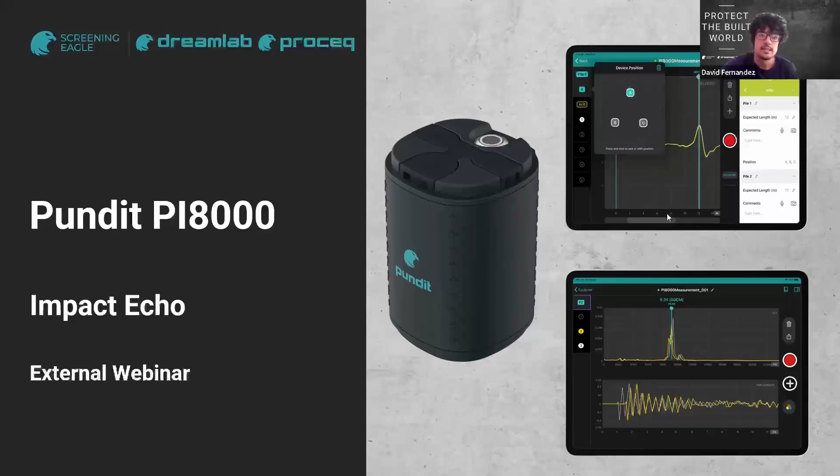Okay, so I'm going to start with a quick introduction on the market, their needs, and why we think this product is going to be really useful for our future clients. So we have the concrete market in the civil infrastructure, and this is a huge market. Every year, around 20 billion tons of new concrete are built. So you can imagine how big this market is worldwide, and it's a very important one.

And in this market, I like to separate the civil structure into 2 different parts, because you will see our device has 2 different features. So that's why I think it's important to differentiate. So we have the above grade structure. There we have buildings, airports, highways, harbors, any kind of civil infrastructure you may have above the grade level. And then we have the below grade structure. As an example, we have tunnels, foundations, retaining walls, metro, subway. You can imagine there are a lot of different types.

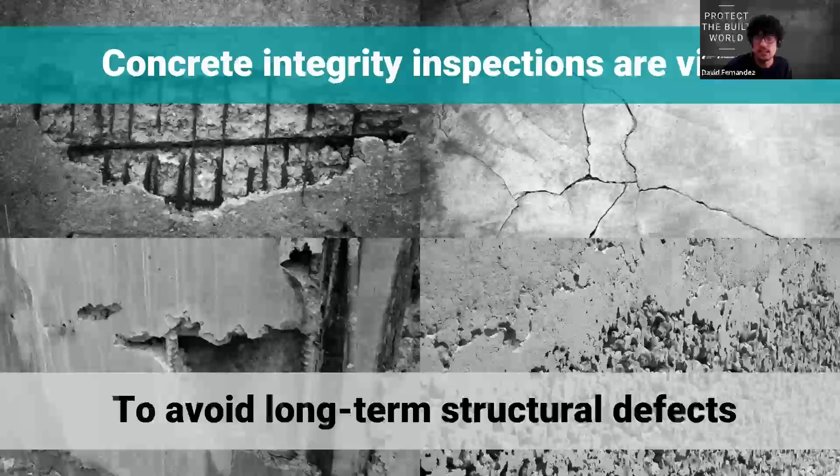And another topic which is really important is that concrete integrity inspections are vital. Concrete has a lot of long-term defects that are normally visible after some years of the initial construction. The most common ones are delaminations, also internal and external cracks. Then you can also have corrosion, that normally also causes delaminations, honeycombs, etc. So that's why it's so important to prevent these damages that are going to affect the structural integrity by inspecting this infrastructure regularly, right?

One of the main problems that some users may have is the estimation of the thickness whenever they want to refurbish an existing building, for instance. They want to know the thickness of a particular slab. So there are some destructive methods, such as the one in the image. You can drill a hole inside this concrete element, and then use a measuring tape to measure the total thickness of the element. But of course, this method is intrusive. You're going to need to repair the concrete afterwards. It's also time consuming, and it's costly, because you can affect one of the inner rebars.

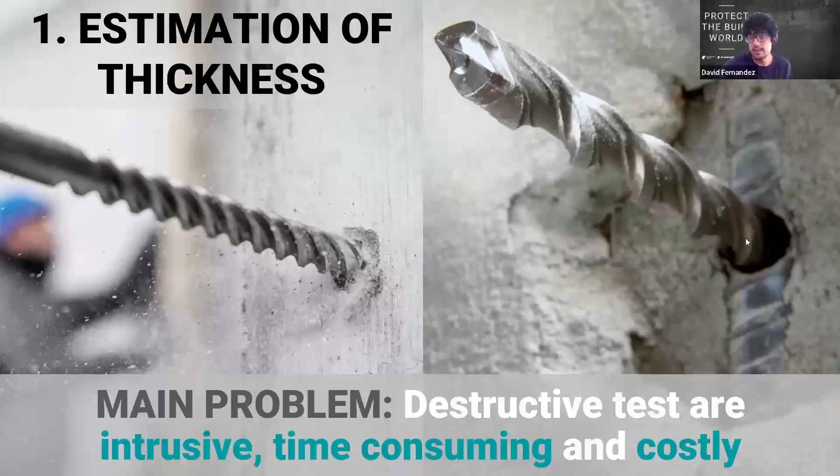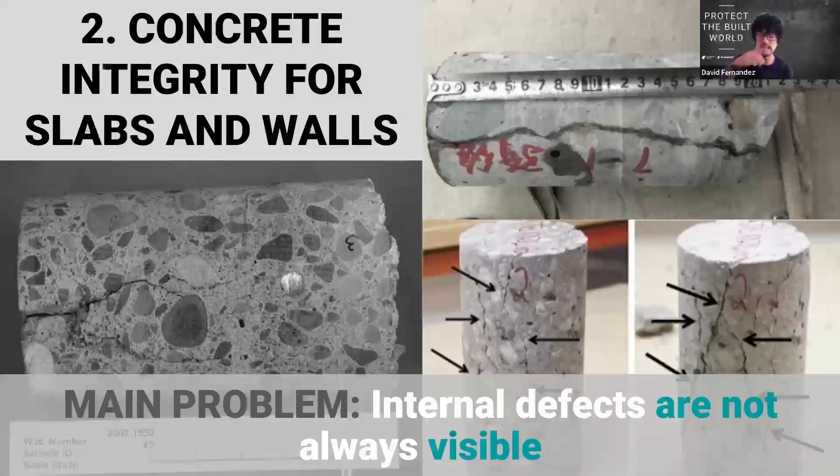And for the estimation of the integrity, a good option is to extract concrete cores. By visual inspection, you can see if there are some internal defects, as you can see in the image. But again, this is a destructive technique. It's really accurate because you can see the defects visually, but the problem is that we need to repair the concrete voids afterwards. So that's where Impact Echo testing is a really good alternative, because it's a non-destructive technique and it's also fast and inexpensive. So this is a very good technique if you want to avoid these destructive techniques that I was talking about before.

And on the other side, as I talked about before regarding below grade infrastructure, we have the foundation piles, which are normally used as a foundation for big buildings whenever we have a soil that is not really strong. So then instead of a shallow foundation, we have this deep foundation, which is the opposite of the shallow foundation. And the main problem here is that there are three techniques that are quite well known, but are expensive and normally require advanced preparation. We have the static load test, which is normally required to test some of the piles that you are constructing, but it's very intrusive and you need huge auxiliary members.

And then this is similar to the dynamic load test. Lastly, we have cross-hole sonic logging, which is a non-destructive technique, but it requires placing embedded tubes inside the pile prior to casting. So you can insert cables with sensors on them.

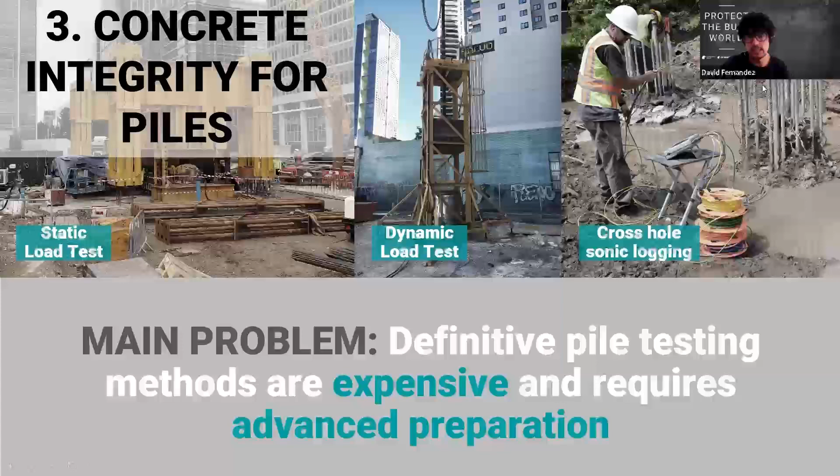So here again, we offer a different technology with the same sensor, which is the low strain pile integrity test. It's also non-destructive, fast, inexpensive, and you don't need to do any kind of preparation in advance. So whenever you have finalized the pile, after some days, you can test it with our system.

One topic I'd like to talk about is this one sensor. With just one sensor, we have two different applications. Both are for estimation of concrete integrity, but on one side we can test piles or foundation piles, estimating the total length of the pile and detecting internal defects. On the other side, we can test walls and slabs, finding the thickness and detecting internal defects.

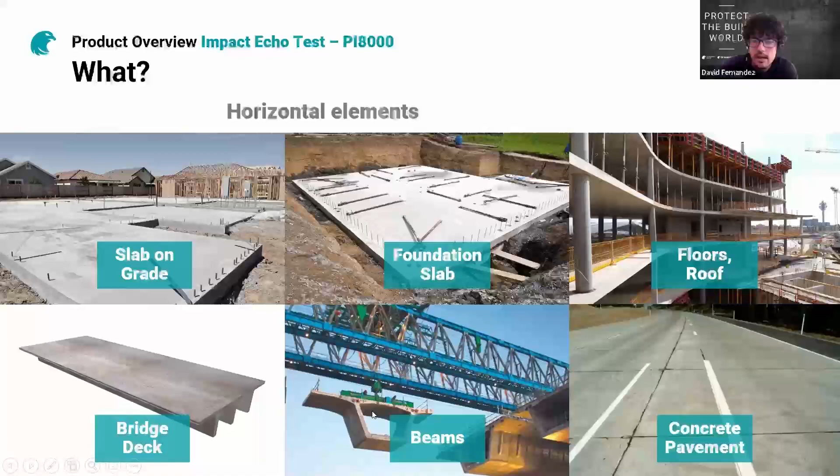So for horizontal elements, I have some examples here, but you may find others in your daily work. We have slab on grade, foundation slabs, any kind of flooring inside the building, bridge deck, any kind of beams — this one is for a concrete bridge, but you can also test beams on a building — and concrete pavement.

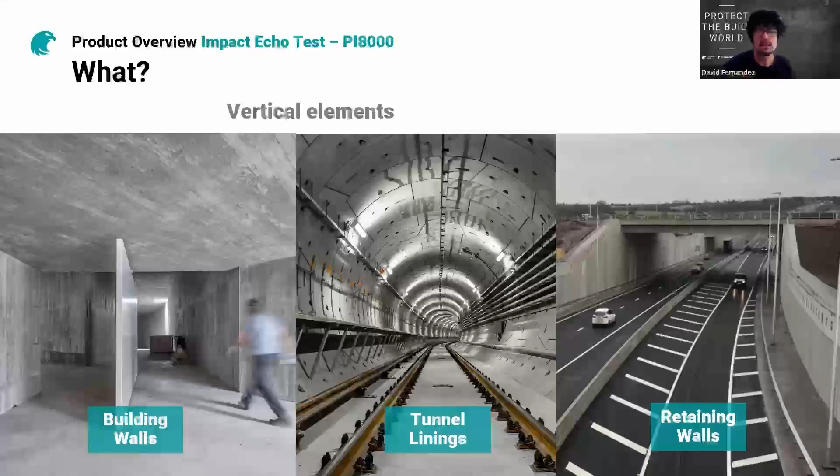For the vertical elements, we have internal building walls. We can also have retaining walls in a highway, or also tunnel linings. So any kind of these concrete elements which have a shape of a structural plate can be tested with this impact echo methodology. So the preparation is really important.

There are some limitations of this system. The first one is that you need to test over a concrete plate. What I mean is that the minimum length has to be at least 6 times the thickness of the element. That means you need to test slabs or walls like I was showing in the previous slides. This is because if you test very near the boundaries or edges of the element, you may have boundary effects, getting reflections from the sides, and sometimes it's complicated to understand the signal completely.

So this is a recommendation, but of course there are some advanced impact echo users that also test over concrete columns and concrete beams. But you need to be a little bit more advanced with this technology.

As I said before, we perform a dry contact solution, so you don't need to use any coupling agent. But in any case, the surface of the concrete has to be smooth and clean. We provide some plastic stickers that you can place over the sensor tip, just in case you're not getting a good signal because the concrete is not completely smooth. You can always place those stickers, they remain on the tip for a very long time, and you just place them there once and use it as many times as you want. So this is very quick and very convenient.

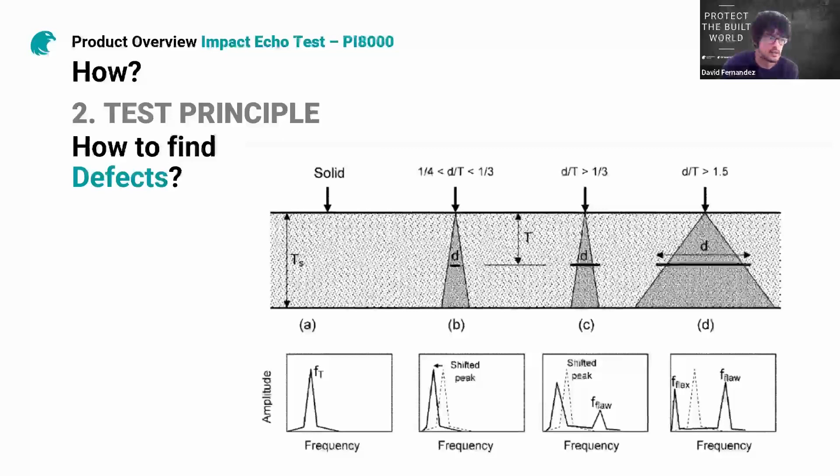One very important topic is the calibration of the wave velocity. This technology is standardized, I mean Impact Echo is standardized in the ASTM C1383 is also standardized in a German guideline. There are three different methodologies covered by this standard for the calibration of the velocity.

One of them is the automatic calibration. For that, you need two transducers that you put one separate from the other, around 300 millimeters. This is something we don't provide with this first version of the sensor, because it requires two transducers and it's much more expensive, almost double price. So we decided to provide the manual mode.

The manual mode is also really good, because you only need one transducer or one probe, and then you just need to go to one element that you know the thickness of. So imagine you know the thickness of one particular concrete slab. Then the only thing you need to do is input here the expected thickness of this element, let's say 200 millimeters.

There are two different options to calibrate: one is manual and the other is automatic. I will show you later in a video, but you can scroll this velocity slider until you match the peak. You see there is a thickness number, so you have to make it match with the expected thickness. This is the more manual way to do it. But if you don't want to do that and just want to know the exact velocity speed number, you just press the calibration button and the app will do it automatically for you. We will see it later in the video in more detail.

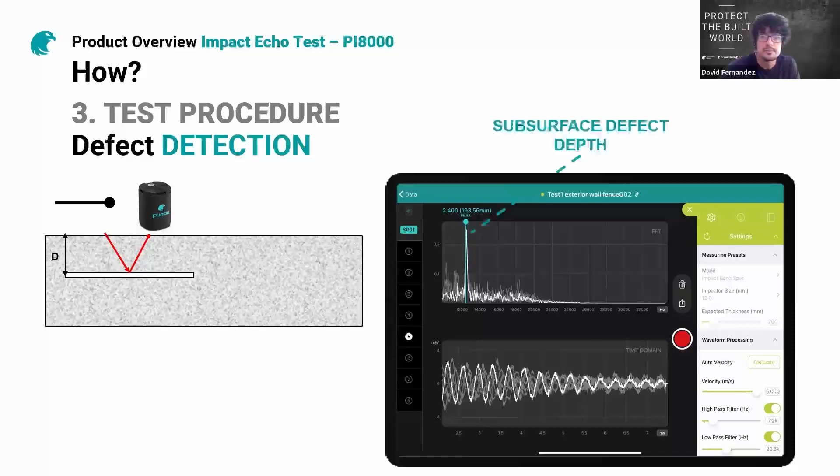So we have two different measurement modes. One of them is called the spot mode, and the other one is the grid mode. The spot mode is really, really useful for quick concrete integrity checks of small areas. So you can define various spots. Then you can also make multiple impacts per spot.

You can delete any spot if you need it. Then you can also delete any impact if you need it. In some cases, you may perform a wrong impact, so you can always delete it, so you don't have any fake data. And then, as I said, the best impact per series is automatically detected by the app, and all the calculations are done by using this particular impact.

Then we provide two different buttons to arm and disarm the probe. You can either use the iPad button, or if you want to just use only the sensor and not pay attention to the iPad, you can always use the button on the sensor itself, which is really, really handy and convenient. So let me show you a video about the spot mode.

So then you have here the three different methods: the pile integrity, which was launched last summer, and the two new measurement modes. Then I'm gonna select the impact echo spot mode. And first, as we have three impactors, you can select the impactor that you are gonna use. And then you can input the expected thickness. So let's say we have a 500 millimeter element.

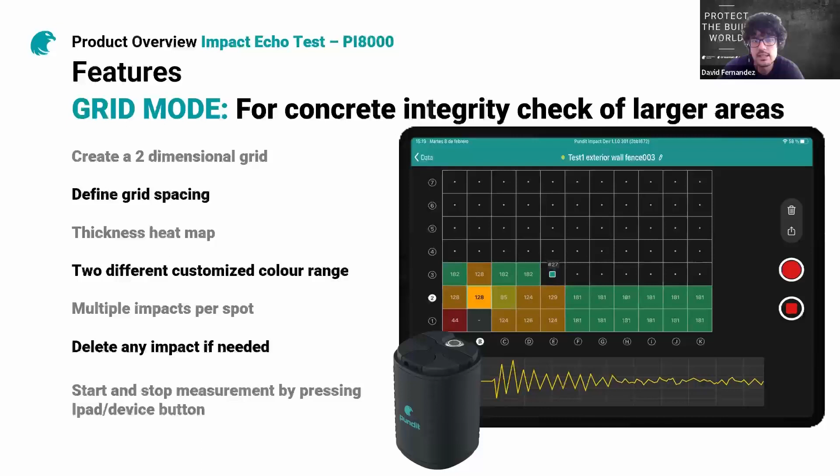So in this particular example, you see that our concrete element has a thickness around 180 millimeters. So it's very likely that this area has some kind of defect, as we are not getting the same signal. And then we provide two different customized color ranges. And it's the same as with the spot mode. You can perform multiple impacts per spot, and then you can delete any impact or any spot if you need it. So again, I'm gonna present this video.

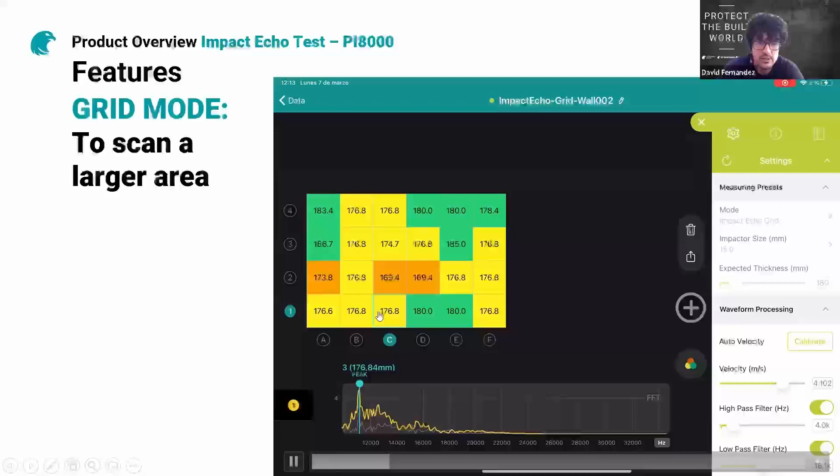So this is a grid scan that I did the other day. This is already completed. So I can just go from A1 to C1. So I can move from one cell to the next one. Then I can see the different impacts that I have done per cell. If I use two fingers swiping up on the iPad, then I will go to this visualization of the time domain and the frequency domain. And then again, here I also can play just to calibrate a little bit.

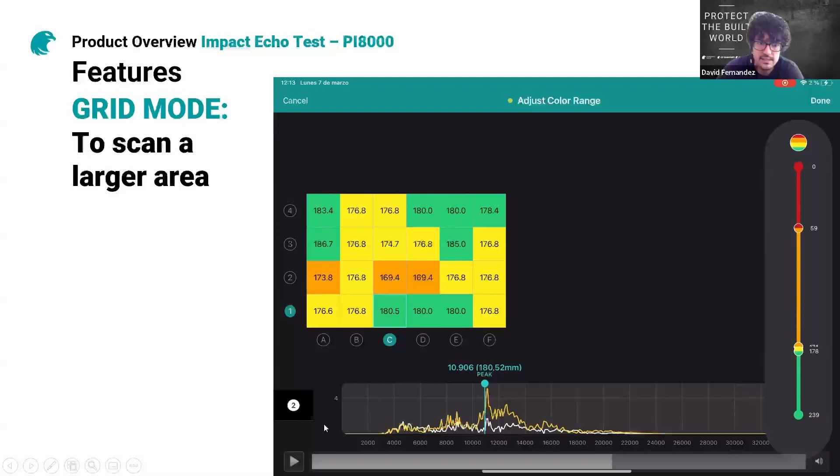So this example is a good one to see that in this area, it should be around 180 millimeters. So maybe in the area that is orange, we may have some minor problems because we are having a peak that is a little bit shifted, right? And we saw before, when you have a small shift on the frequency peak, it's very likely you have small defects inside. So then you can always play with the color ranges. Okay.

So then we have a lot of additional settings that are really good not only for expert users, but also for non-expert users. So we have this auto gain functionality. We automatically do this transformation from time domain to frequency domain. Of course, as I said, the frequency domain is easier to understand than the time domain graphic. Also, this peak on the frequency domain graphic is automatically detected. So then you will automatically have the thickness of the element.

And we have these very useful high and low pass filters that are very good to eliminate the noise in the very low frequency or high frequency areas. And you have full control of the filters that can be applied to all spots. So once you have set the filters, they will apply to the future spots you are testing. And finally, we have this comparison mode. So you can compare the different impacts per spot. So you can neglect one of the impacts.

Yes, this sample is really good because we have this blue small signal on the bottom that is pretty sure an incorrect or a mistaken impact. Maybe I just made an impact on the sensor or whatever. So I can delete this impact, which is number one, the one that is highlighted. I can long press on number one, and then I can delete the impact. So it's no longer there.

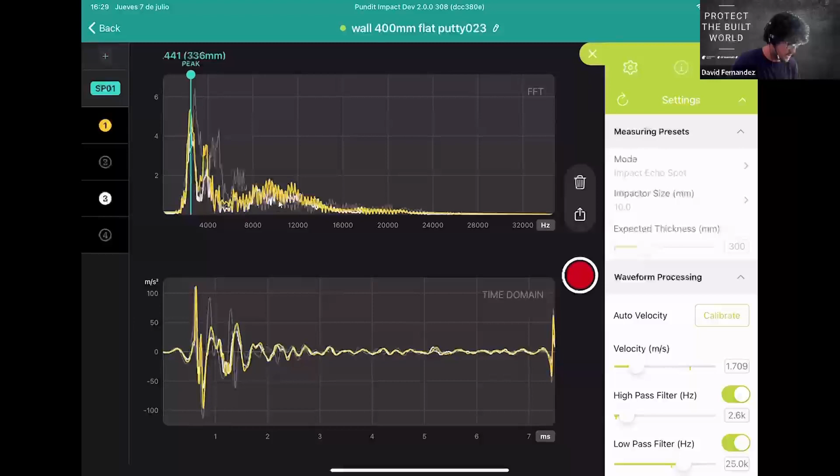It's completely real time. I'm gonna show you later a demo file that I did yesterday, because this signal makes no sense as I am testing over a table. But this is just to let you play with this, so you see how fast the acquisition of the data is. So then if I don't like one of the impacts, I can delete it. Then I can create a new spot, right? So I can just make again some impacts.

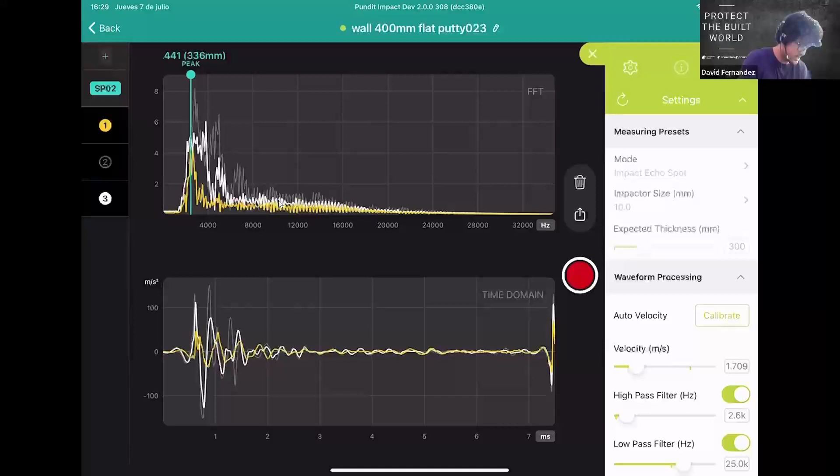Okay, so just imagine the thickness of this element, let's say, is 300 millimeters, right? And then you see here it says 336. So this is because the velocity is not calibrated. So I can move this scroll manually, or better, I just click calibrate, and then you see now it's 300 millimeters, matching the expected thickness, and it's telling me that this velocity is 1,526 meters per second. This doesn't make sense because, as I said, I was just testing on my table, but this is just for you to see how it works.

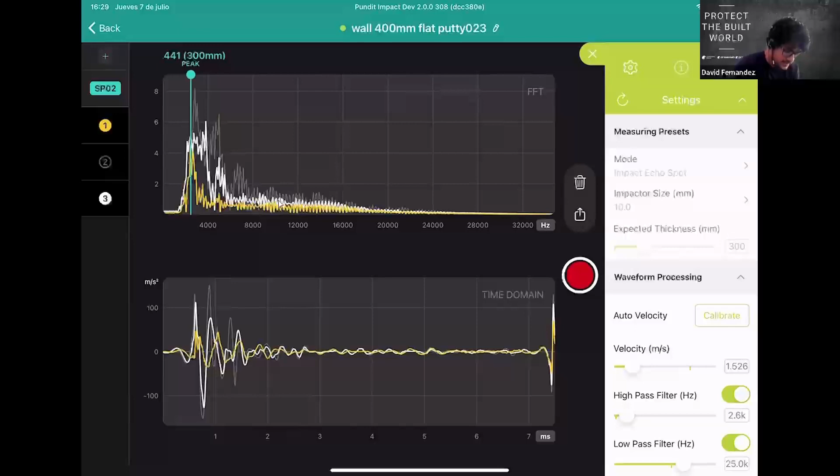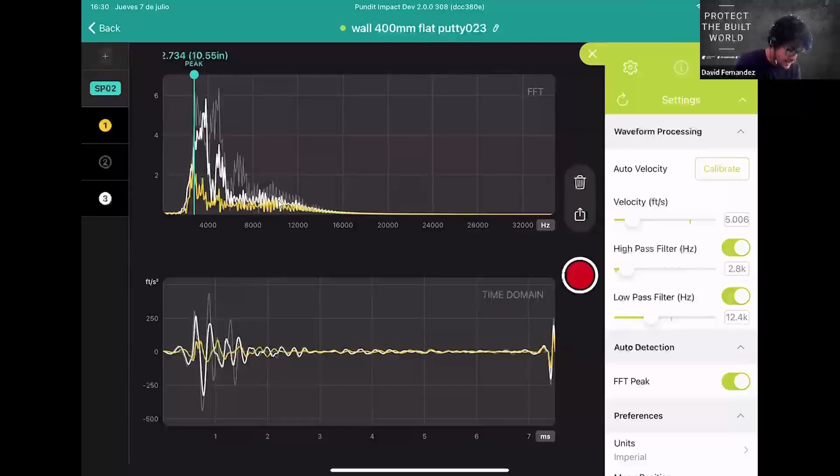Also, we have these high pass filters and the low pass filters, so you can play with the graphic a lot. And then we have also imperial units or metric units. I would say most of you joining this webinar are from America right now. So I can just put it on imperial units, so I have the units in inches. And then I can create any comments here.

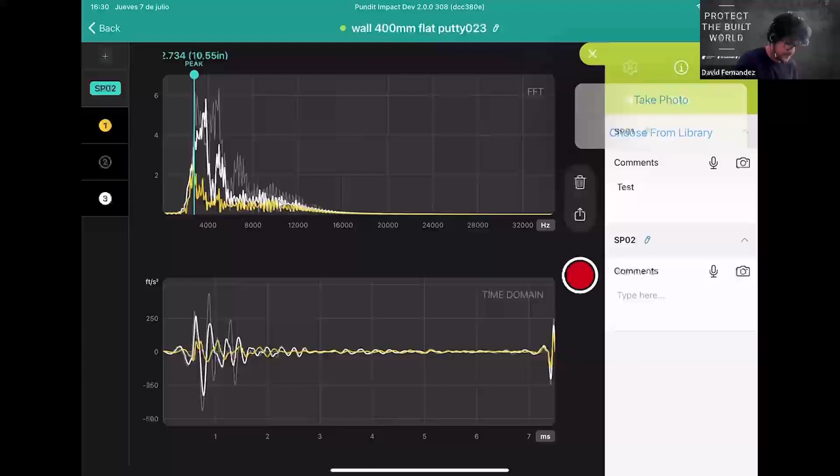I can also play with the audio comments or make a picture. So let's make a picture. Okay, so this photo is gonna be there. And then you have the logbook, which is really good. It's just for traceability about what you have done with this particular test. So you see, this is the location. Right now, I am in my house in Malaga, Spain. And then you can see everything that I have done before. So the traceability is really good. So just let me show you quickly one real example.

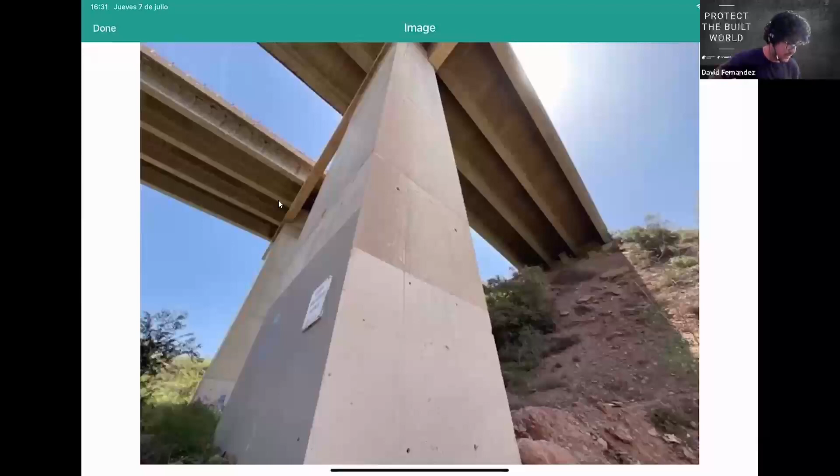So for instance, the bridge. So this is a bridge that is nearby my house. I would like to show you some pictures so you have an idea. Okay, so this is the bridge, and I was testing this concrete column, which is a hollow concrete column. So I was testing in the front face and in the side face of the column. So that's why I have two spots, right?

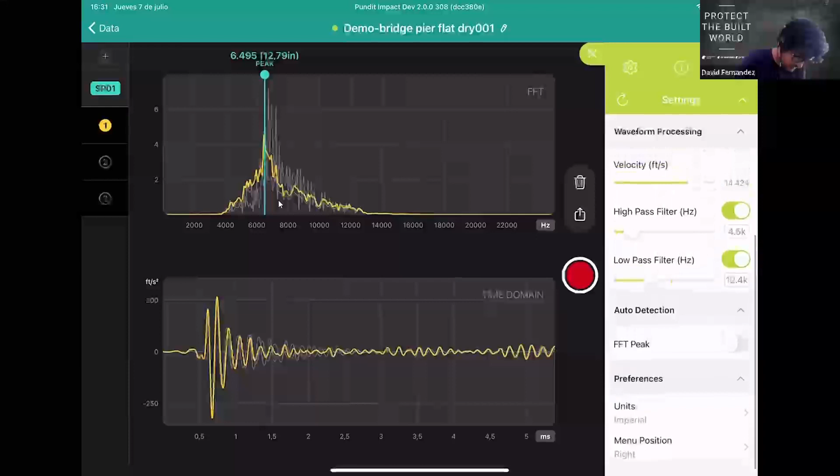So on the first spot, you can see here, this is a more normal graphic that you will normally see whenever you are doing impact echo. So this is around 13 inches thickness. So just let me go back to millimeters just in case. Okay, so this is 325 millimeters, which is a normal thickness of this kind of elements.

And then I can go to the spot 2. And this area is thinner, sorry. So you see this area is around 200 millimeters. And as you see, all the impacts are more or less similar. That means there is not internal defect in here.

And then I want to present also a demo file of a grid scan that I did. This one, for instance, okay. So that one, it was a wall. I don't think I have the picture, but it's a retaining wall in my office. And then it was 250 millimeters. I was able to measure the thickness because the top of the wall was visible.

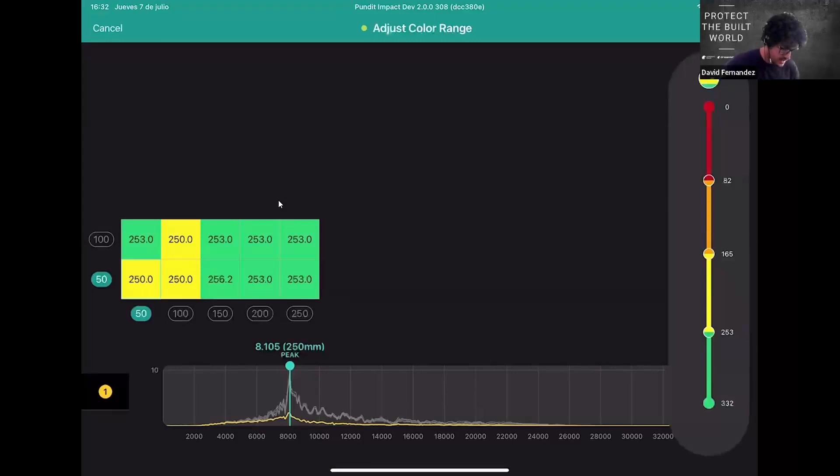So you see, this wall is perfect. Here, I can select 250 millimeters. And then you see everything is green, which means the thickness of this element is always the same, meaning that there is no internal defect. So again, here I can select the impacts that I was doing. And then if I just swipe my two fingers up, I can go to this time domain and frequency domain graphic. So I can press any of the cells, and then I can see individually each of these cells.

Okay, so let me go back to the presentation. All right. So I think this has been more or less useful for you, I hope. And this is a summary. So for what is this technology? We have already talked about this, but I would like to summarize everything. So this is just to estimate the concrete integrity for walls and slabs. You can measure the thickness and you can locate any kind of internal defects.

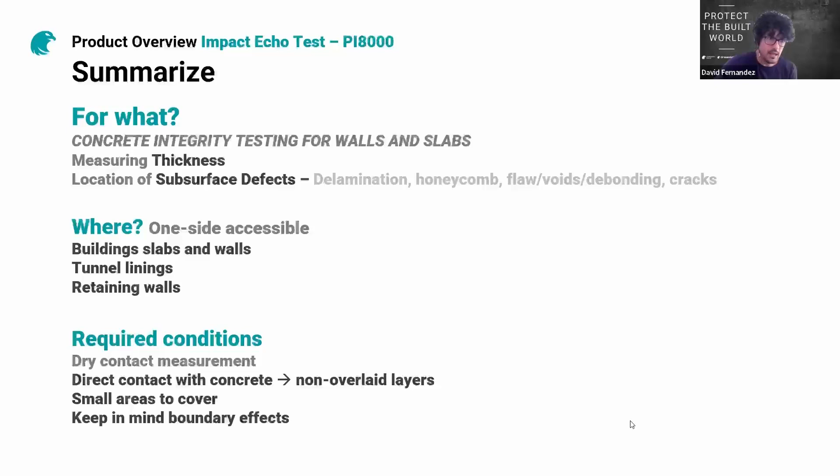So you can use it to detect delamination, honeycombs, flaws, voids, debondings, cracks. And also we have some clients using it to detect voids inside precast ducts. So this is also a technique that is applied. And the required conditions, as I said before, dry contact measurements, so no coupling agent is needed. It's normally used with a direct contact over the concrete. But I know some people that also use it over asphalt overlays, but it normally works better if you are testing concrete elements. And this is very useful for small areas to cover.

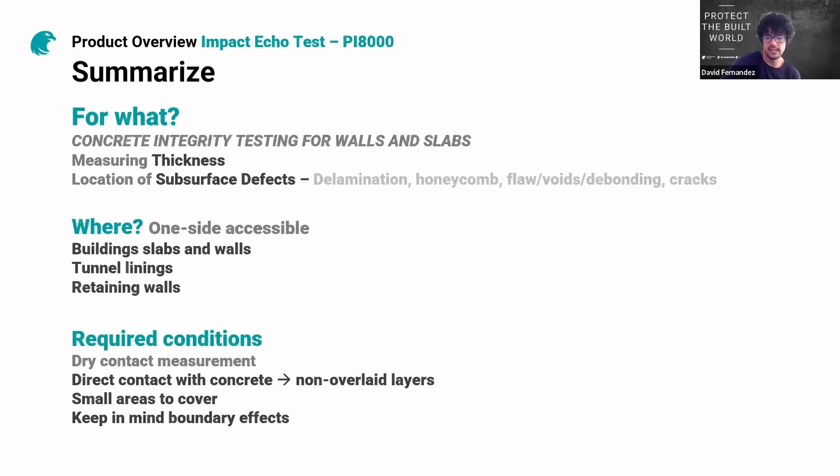If you want to do a huge scan of a bridge, we have some other concrete sensors in our portfolio. That's why I would like to present also in this slide the PD8050, which is a different sensor in our portfolio. Some of you may know it. And this is, of course, a more powerful tool whenever you want to do a bigger scan, because it's faster and also the visualization of the data is more powerful. But in any case, the PI8000 is really useful to just check a spot and small areas. It's a very light and quick device for concrete integrity inspections. And as you saw, it's really, really easy and really quick.

And it's really good when you have areas with a lot of rebars, because this methodology relies on the impedance, as I said before, and the impedance of the steel is similar to the impedance of the concrete. So if you have a lot of rebars, the sound wave will travel through those rebars, and then you will be able to detect voids below those rebars. So this is a very useful tool for that. And this is standardized in the ASTM. So if this is standardized, it's easier to use it for a particular client, because it's standardized in the ASTM standards. And as I said, it can be used for pile integrity testing. So this is a 2-in-1 device, which is also very, very useful.

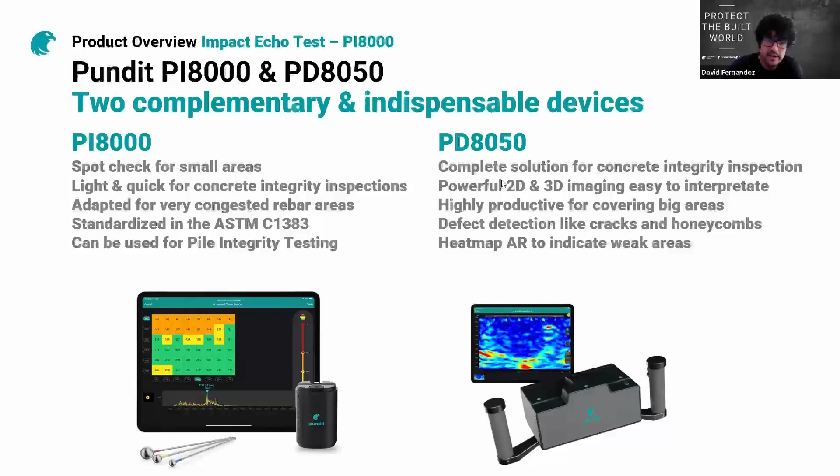Okay. And the PD8050 on the other side, as I said, is a very useful and powerful machine for bigger scan areas. The visualization is easier because it has powerful 2D and 3D imaging, which is easier to interpret if you are not an advanced user. And we also offer in this device an augmented reality heat map to indicate these weak areas. So as I said, this device, PI8000, is standardized. When we are talking about pile integrity testing, we have this standard, the D5882. And for the impact echo technique, we have this German guideline and also the ASTM C1383.

So as you can see in the image how small it is, if you can see me, right? So it's very small, and the impactors are like that, okay? Okay, so we have 3 impactors, as I said.

The smaller one is useful when you want to check thinner elements and superficial defects, because it creates a high frequency wave which has less penetration but much more accuracy. Not accuracy, but I would say much more, I don't know how to say this, let's say accuracy. And the bigger impactor provides a lower frequency, which has more penetration, but is less accurate than the smaller one. So the biggest one is really useful if you want to test thicker elements.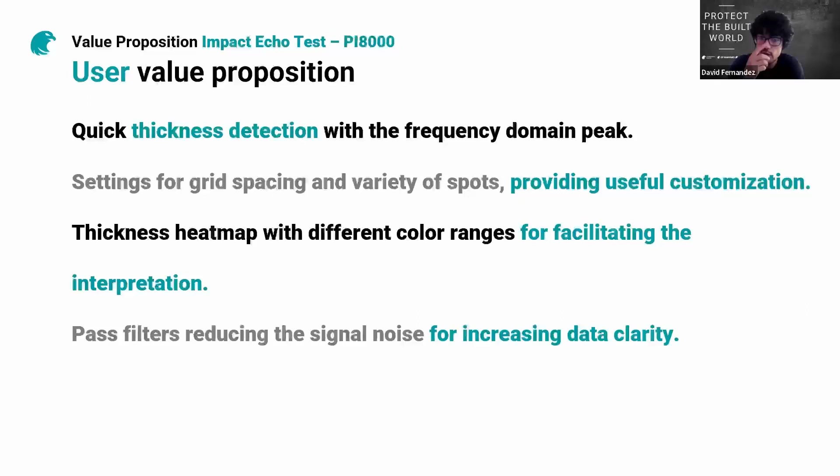And I think I said that before already, but this grid visualization is completely customizable. So this is also very good for the users. And we have this thickness heat map with two different color ranges for facilitating the interpretation.

Okay. So just as a conclusion, we have two applications in one device. So remember, we can use this app in pile integrity testing and in impact echo testing. So if you are a user that normally does, or your company normally does both tests, you don't need to buy two different sensors, because we are the only product in the market that is able to perform both tests with the same probe, with the same sensor, with the same app.

So this is really good because it's a huge cost savings, and it also allows you to reduce the inventory. And then the workflow is completely optimized because you can do the analysis in the field, in the construction site. We have a simplified entry of measurement locations, and the completion of the fieldwork is much faster and you will make fewer errors.

This is because you can always share in real time the data that you are collecting with your boss or your superior or the analyst. So maybe this analyst would like you to perform an additional spot test. Then you don't need to leave the construction site, because the communication is really fluent. And this saves a lot of time and money, of course.

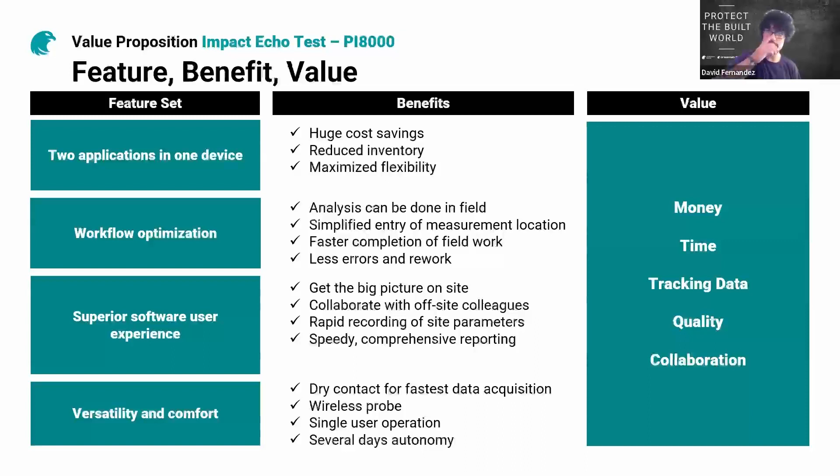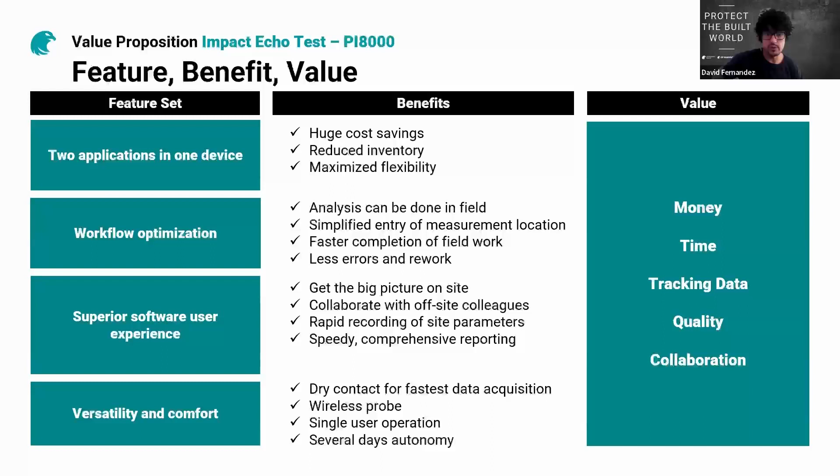Then, I didn't talk about this, but the sensor is completely wireless. So there are no cables at all. You can connect the sensor with the iPad via Bluetooth, and then you don't need to use any cable. So this is very, very good because you can perform any kind of impact echo test with just one operator. So you only need one person on the site, and you are saving, of course, a lot of money. You don't need to hire 2 people to go to the site.

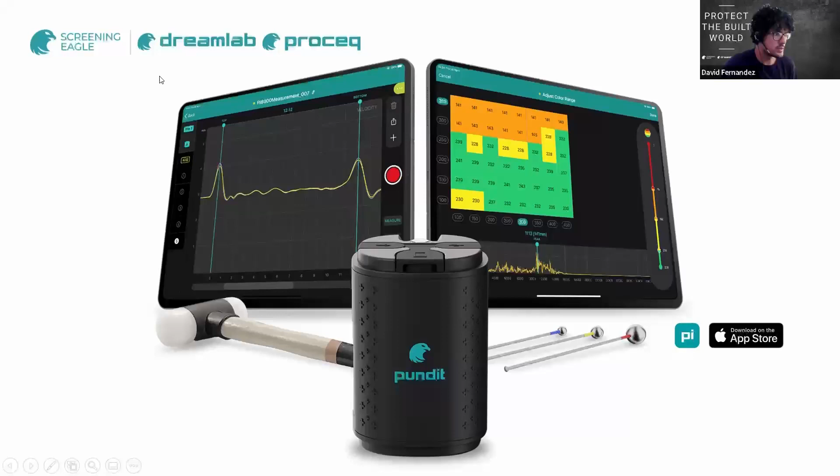And this is all that I have from my side. So now I'm gonna have a look if we have some questions. So let me go back for 1 second. Okay. So I see there are some questions. Okay, just give me 1 moment.

I'm collecting them. So, okay, the first question is, what is the maximum penetration I can reach with this product? So that's really a good question. We had a webinar this morning and somebody asked something similar as well. So that depends a lot on the concrete quality, and also on the size of the hammer or the impactor that you are using. As I said, you need to use the bigger impactor to go deeper. You will have less resolution, but you will have more penetration. But in any case, I would say a normal application would be around a maximum penetration of 60 to 80 centimeters.

Okay. Another question, what is the accuracy of the product? So, okay, this is also a good question. The accuracy depends a lot also on the calibration of the speed. So if you perform a good calibration of the speed, just imagine you have a 2-side accessible element and you know the thickness of the element, then the calibration of the speed is gonna be perfect. The accuracy of the measurements is gonna be around 2% of the thickness. So if you have, let's say, 200 millimeter thickness, then you may have an error of 4 millimeters, which is really, really small.